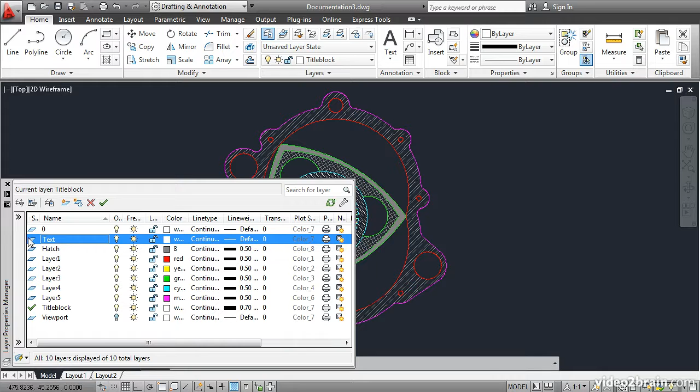Open the Documentation 3 project file. Before we create any text, let's create a layer to hold it. Go to the Layer Properties Manager and create a layer called Text. Set that layer current. Then type ST, which is the alias for style, and press Enter. Create a new text style called Title.

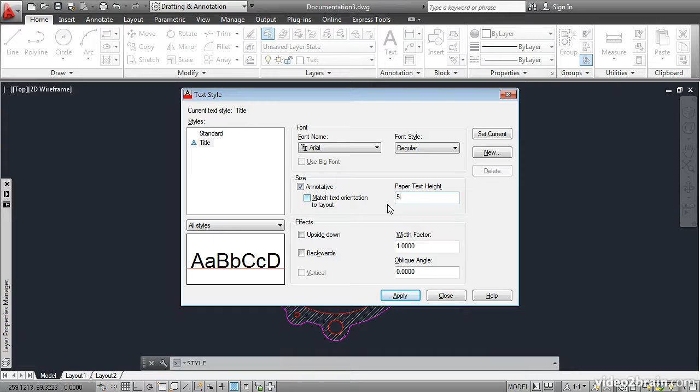OK. Check Annotative, and then change the paper text height to 5, which is 5 millimeters in this case. Click Apply and Close. Next, create some multi-line text.

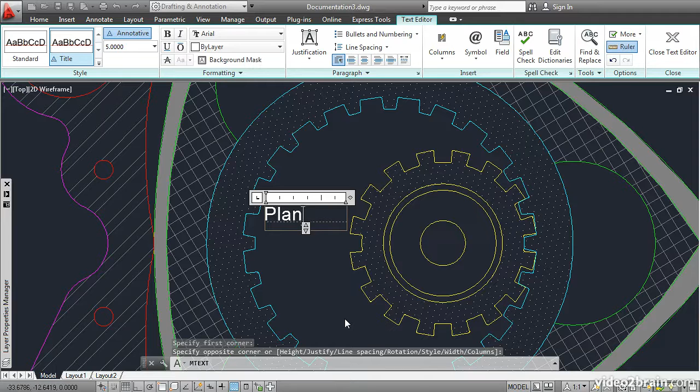Zoom in to this area between the gears and click the two opposite corners of a rectangle. Type the words planetary, enter, gears, and then close the text editor. Move this down so that it's roughly centered between the gears. Zoom out a bit.

Next, come down here and look at these three controls. These govern the annotative feature. This icon, when on, allows you to show annotative objects for all scales. Well, right now we just have one object at this one scale. This allows you to automatically add scales to annotative objects when the annotation scale changes.

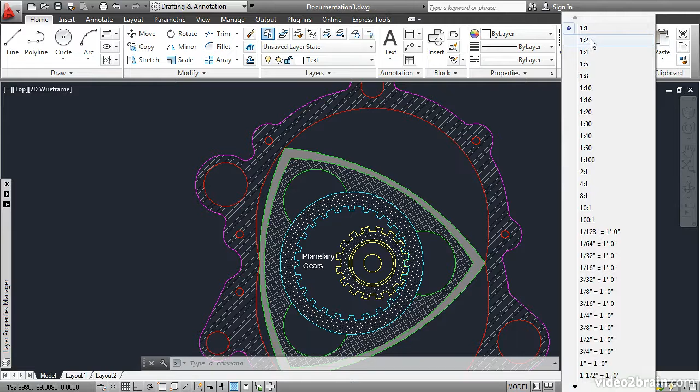Let's toggle that on. And then let's go ahead and change the annotation scale by using this pop-up. Change the annotation scale to 1 to 2. We automatically got a new representation at a different scale. This text is larger because if it's displayed at a scale of 1 to 2, it has to be twice as large to display at the same effective size as the original text, which was displayed at 1 to 1.

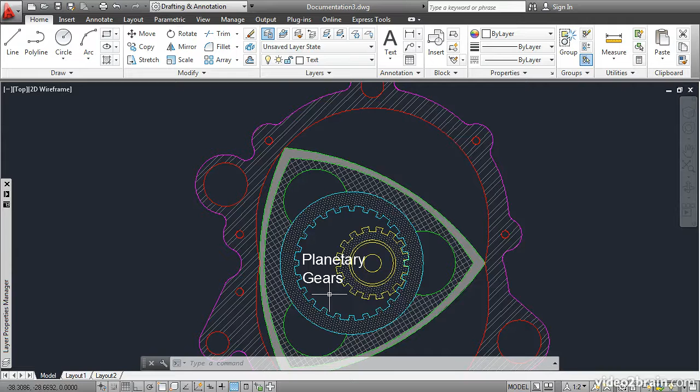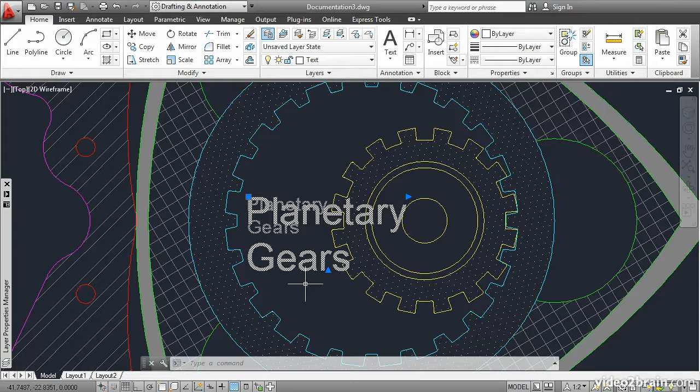Click on this object, and you'll see both scales appear. We have a smaller representation, which is designed to appear at a scale of 1 to 1, and a larger representation, which is designed to appear at a scale of 1 to 2. You can actually move these representations apart using the grips. Zoom out, click this grip, and move this up here in this blank area where there's more room.

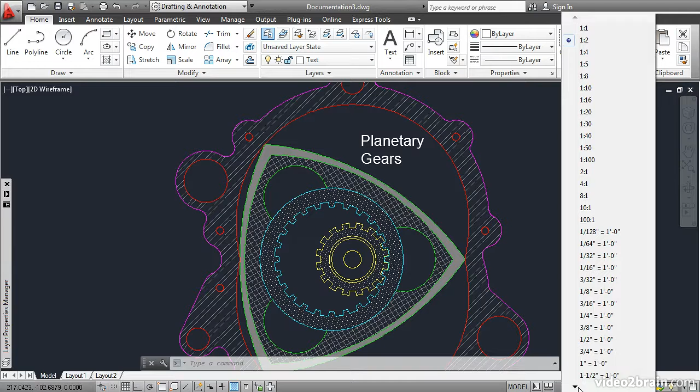Press Escape to deselect. Notice that this representation disappeared. That's because I'm looking at this right now at a scale of 1 to 2. If I change this back to 1 to 1, you'll see the other representation, which is designed for this particular scale. So you see, annotative text allows you to represent the same information in as many scales as you need.

Now let's go to Layout 1. In Layout 1, we see the text two different times because we're looking at two different viewports at two different scales. So this is the beauty of it. We get the text at 5 millimeters in height no matter what. Over here it says planetary gears, but it's not clear what it's referring to.

So I'm going to zoom in there, and in Paperspace I'll draw a line from right here, and then I'll use ortho and draw it horizontally some short distance. And then I'll turn off ortho and click a point right here on this gear. Enter. Repeat the line command, and then snap to this end point, and click a point down here.

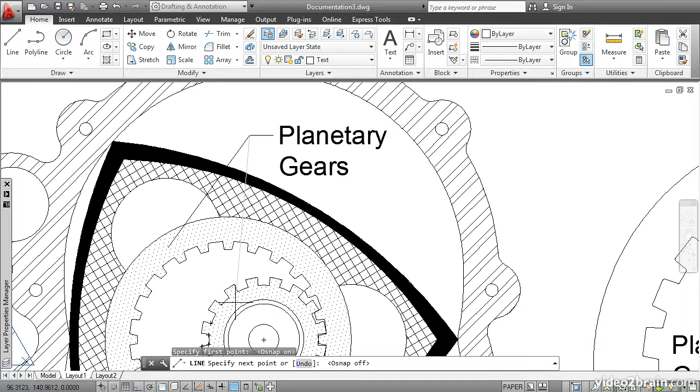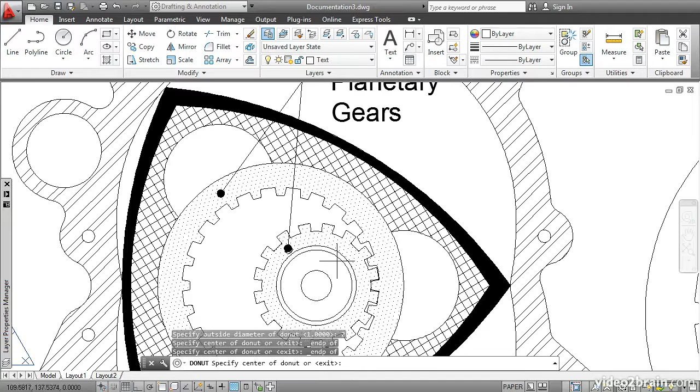I'll turn off snap and click a point on this gear somewhere so that we can see what these lines are pointing to a little more easily. I'll type DONUT for the donut command. I'll type an inside diameter of 0 and an outside diameter of 2. And then I'll use the endpoint snap to snap it to this line. And again, over here. Enter.

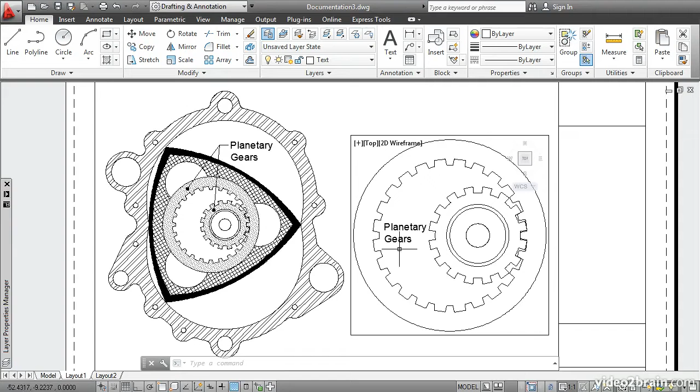So now the text refers to the planetary gears here, and this viewport can be activated by double-clicking. So this viewport is at a scale of 1 to 2. The viewport scale matches the annotation scale. Over here, we have a viewport at a scale of 1 to 1. We don't need any special leaders here because it's obvious that it's referring to these gears. I'll double-click outside, and over here in the corner of the title block, we can add some more annotative text.

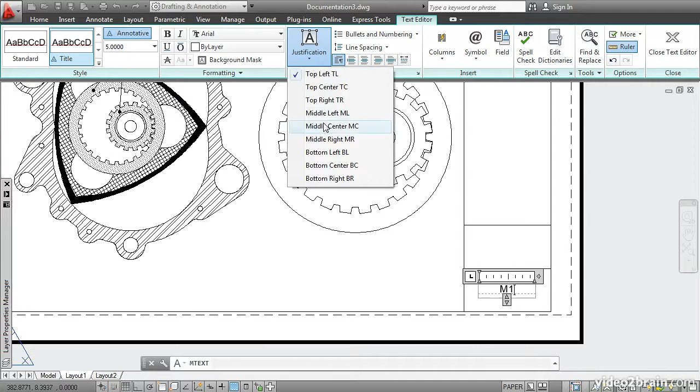I'll click the multi-line text tool again, click 2 points to draw this rectangle, and then type M1 for mechanical 1. And then I'll change the justification to middle center. Close the text editor, and the text that I just drew here in the layout also measures 5 millimeters in height.

So in this lesson, you learned how to create annotative text styles, objects, and representations at different scales. You also used grips to arrange the text representations differently in 2 separate viewports and on a layout.